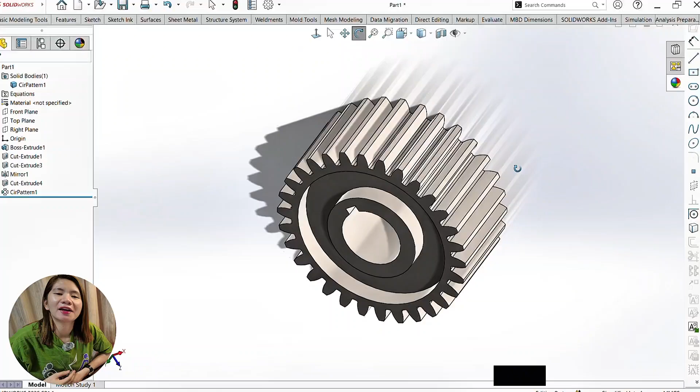Okay, so for today's video, another tutorial. We're going to make a spur gear.

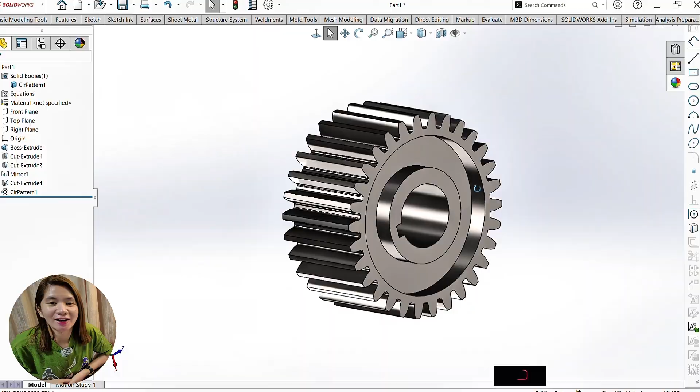Okay, so we're here in our working area. Let's go to the right plane, then sketch tab, and make a circle. Then go to sketch, smart dimension. The diameter of our circle is 32.

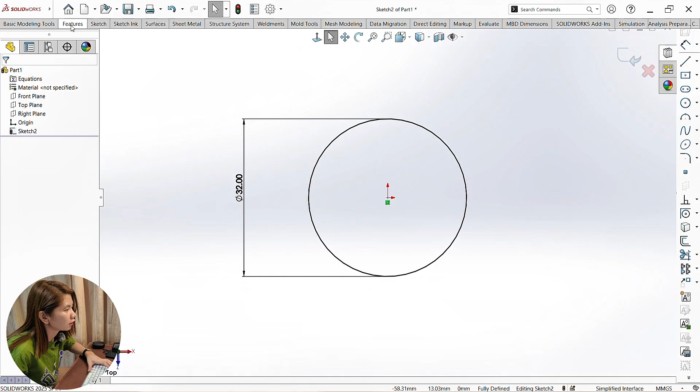After we've made the circle, let's extrude it. We'll use mid plane. The depth is 15, and that's its depth. Okay, so now we've made our circle.

Let's create another sketch, make another circle, and the diameter of this circle is 10.

Go to sketch again, go to center rectangle, and make a rectangle here, since we're going to make a keyway. Smart dimension: the measurement is 2x2.

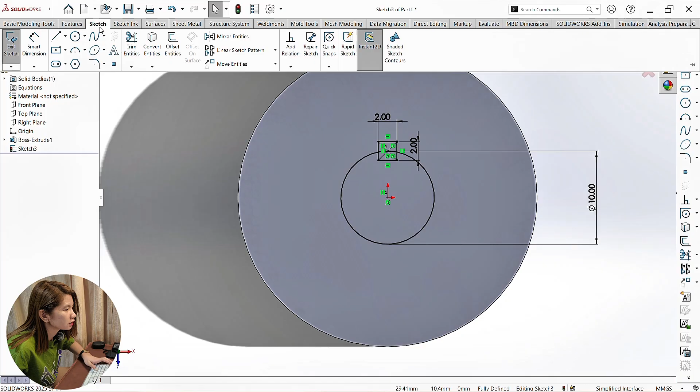2x2. Then back to sketch, trim entities. Let's zoom in and remove these excess lines. Okay, so now we've made the keyway.

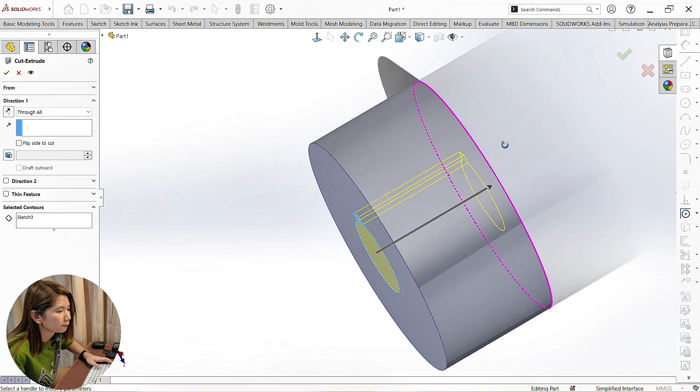Okay, let's go to this face, create sketch, and make 2 concentric circles - this is the first circle, and this is the next one. Then go to sketch, smart dimension. One circle's diameter is 15, and the other one is 25.

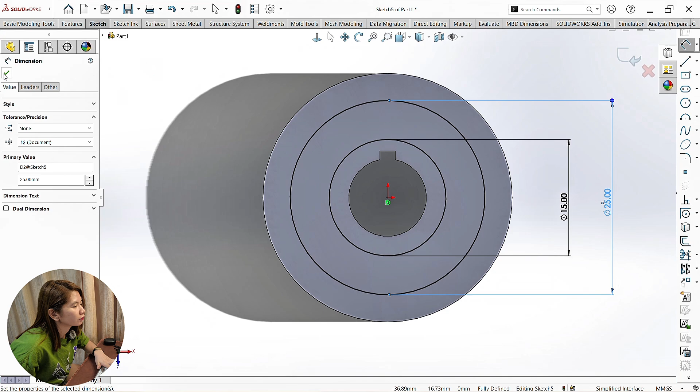Exit sketch, then go to features, then extruded cut. This time we'll do blind, so it's set to blind, and its depth is 3 mm. We need that. Okay, so you can see we've made another part.

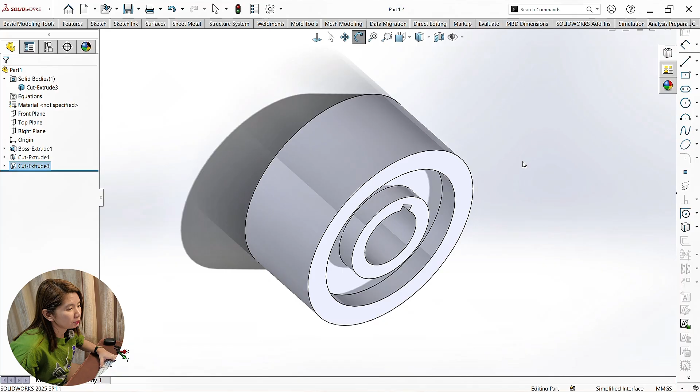Now we're going to mirror this extruded part to the other side. Go to extruded cut, highlight it, then go to features and mirror. We'll mirror it onto this face, just click this plane. Now you can see it's been mirrored to the other side. Let's click okay.

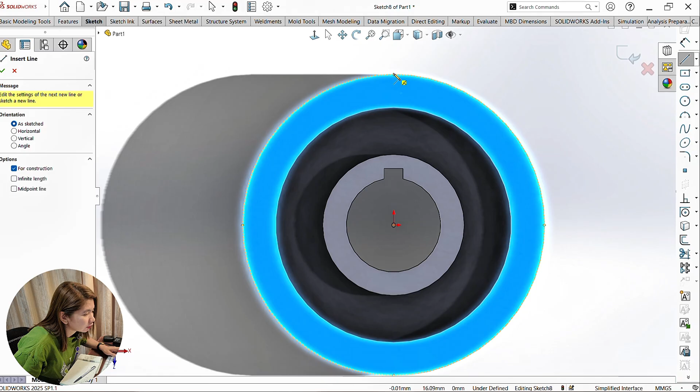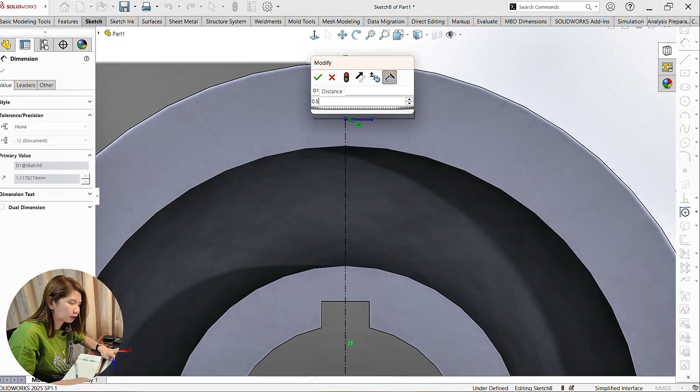Select, then go to sketch again and make a horizontal line here. Select, then go to sketch, smart dimension. The dimension is around 0.5.

Go to sketch again. The dimension from this horizontal line up to this origin is, let's say, 13.6.

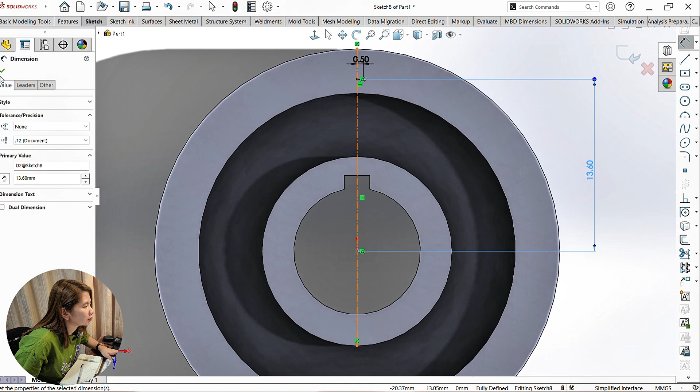So after making the reference and the horizontal line, let's go to sketch and make a 3-point arc. Click here, then click this point.

And then this point, and here. Okay, and then dimension. So let's get the horizontal dimension. Click this point and then this point. So the horizontal distance is 1.58.

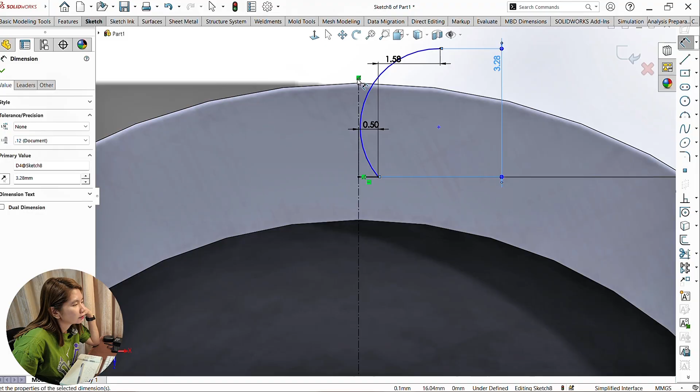And then for the vertical distance, click again this point and then this point. So let's say 3.28. And then the radius of our arc is around 4.56.

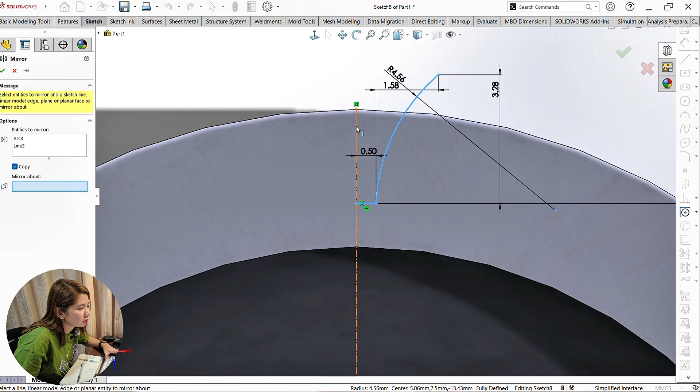So we already got the other side. So what we are going to do again is mirror it to the other side. Go to sketch, then mirror entities. So the entities to mirror, these two, just highlight. And then mirror it here on the center line. Click this, okay. And then okay. So as you can see, it's already mirrored.

Next, let's go back to sketch, and then go to 3-point arc. So let's close this part. Okay, and then select, and then go to sketch, smart dimension. So the radius of our arc is 18.

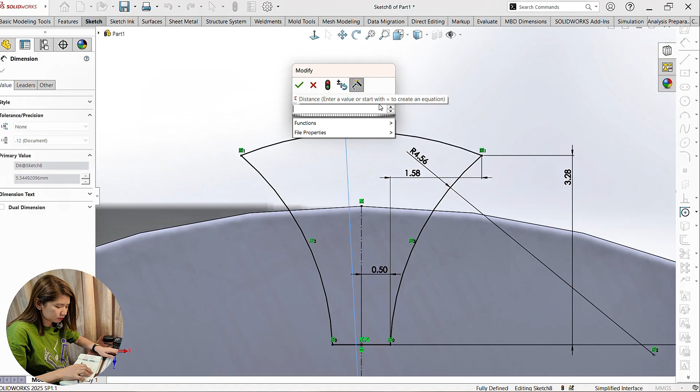Then okay. So we've made the profile of our tooth. So the next thing we're going to do is extrude cut it. Okay, exit sketch.

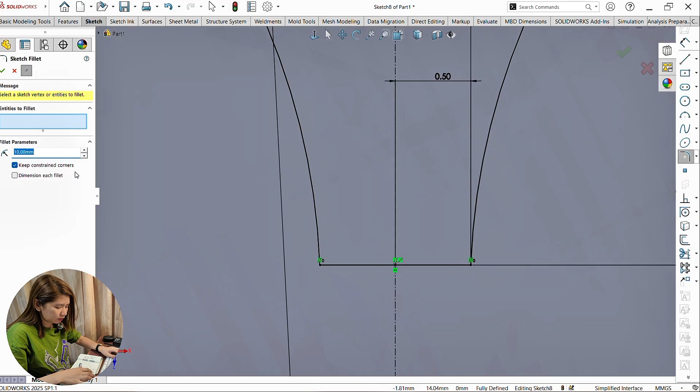Before we proceed to extrude cut, let's fillet this edge first. So here we go to fillet. The fillet value is 0.3, just 0.3. So we need to fillet this edge before we extrude it. Yes, okay, so as you can see, this side is now filleted. So it's ready for extrude.

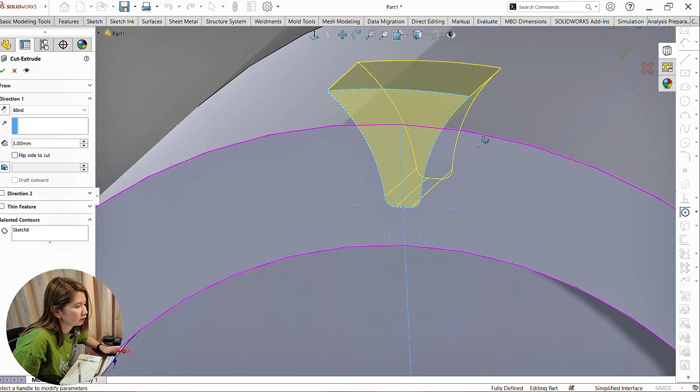So let's exit the sketch. Then go to features, then extruded cut. Okay, as you can see it's extruded. But this time what we'll do is through all. Okay, and then okay. See, it's extrude cut now. We cut this part.

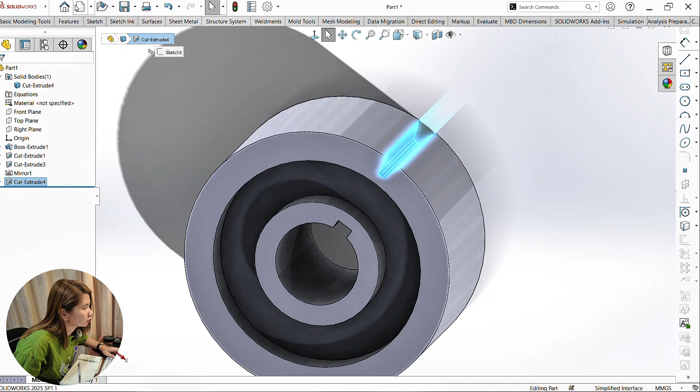So what we are going to do next is make a circular pattern here, so we'll make a gear. Go to features. First, let's highlight this part. Then go to features, go to linear pattern, there's a drop down arrow, click this circular.

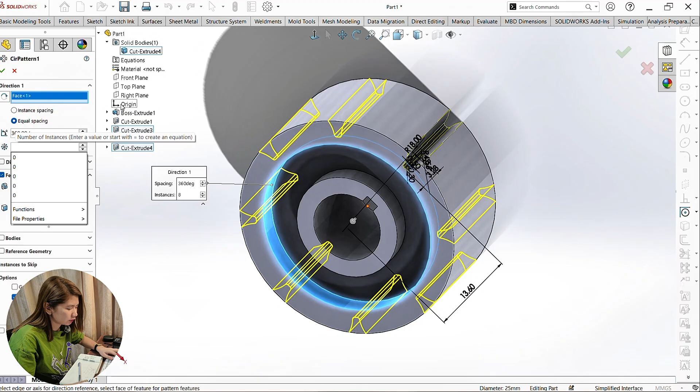As you can see, it now has a circular pattern. Then okay. So that's it, that's how easy it is to make a gear.

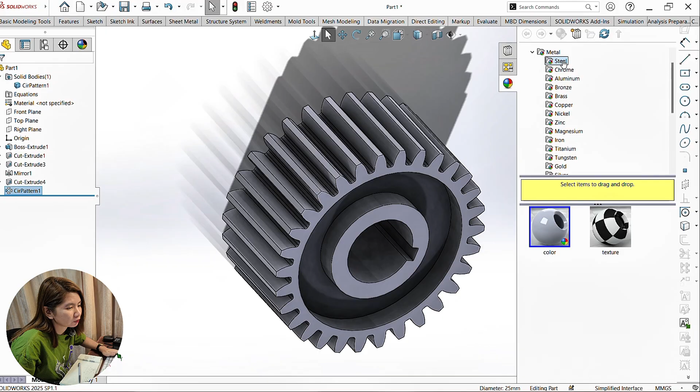So if you want to change the appearance, go to this icon. Click appearances, scenes, and decals. And then go to appearances, color. Then go to metal, then it's up to you what material you'll use. Let's say steel, so we just set that.